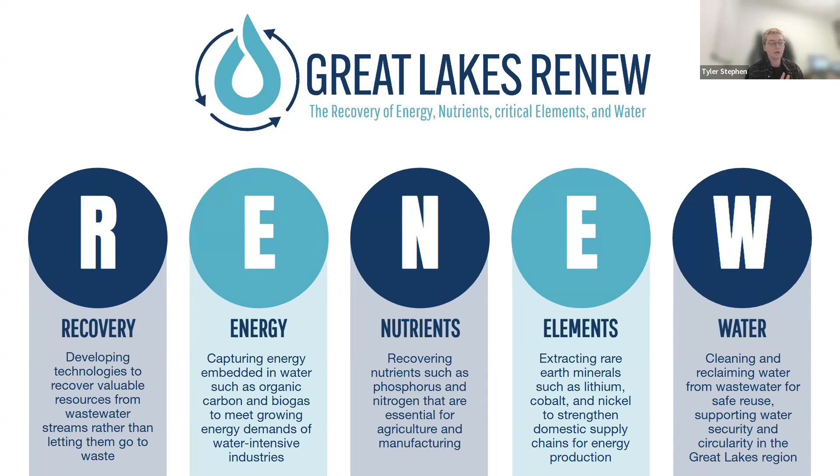We approach that from multiple different areas. We're looking at spurring the circular economy transition, so looking at the workforce required to support circular economy innovation. We're supporting the invention and commercialization of selective separation technologies, through funding of research and development projects at both the academic level, as well as supporting startups and innovators developing use-inspired technologies to support the circular economy. And we're also supporting the attraction and retention of water-intensive industries in the Great Lakes region, including Illinois, Indiana, Ohio, Michigan, Wisconsin, and Minnesota.

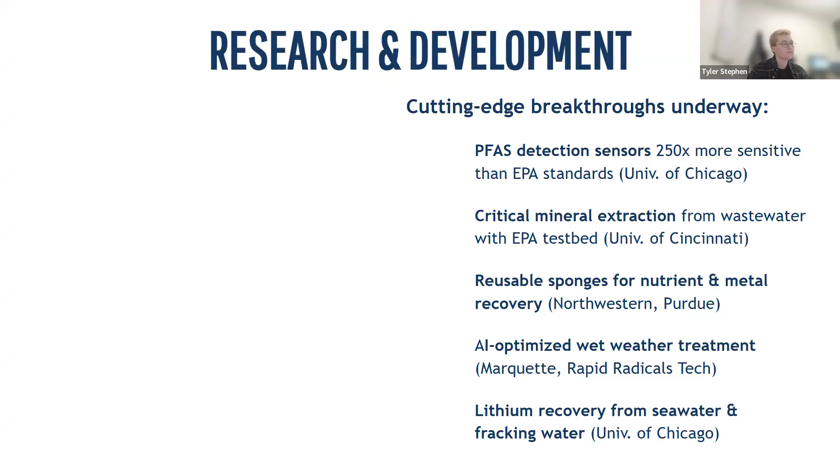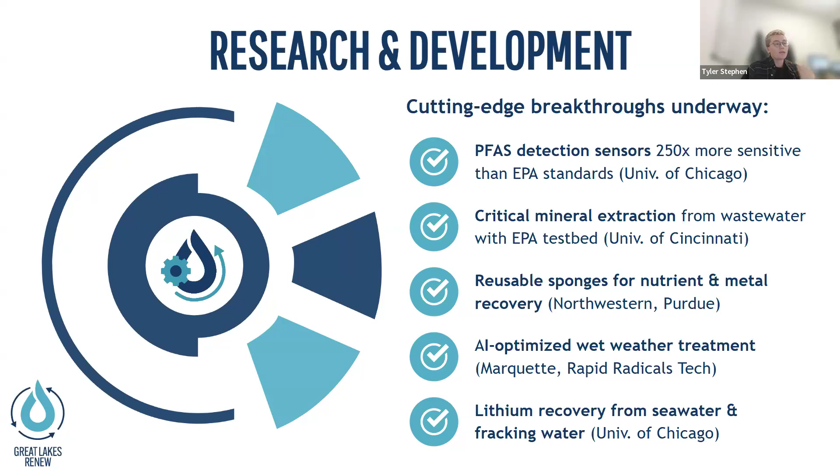Within that class of the recovery of nutrients, elements, and water, we are currently supporting several innovative research projects. Just to give you a highlight: we are supporting projects in PFAS sensing, critical mineral extraction, and nutrient extraction and recovery, all through our research partners at various institutions.

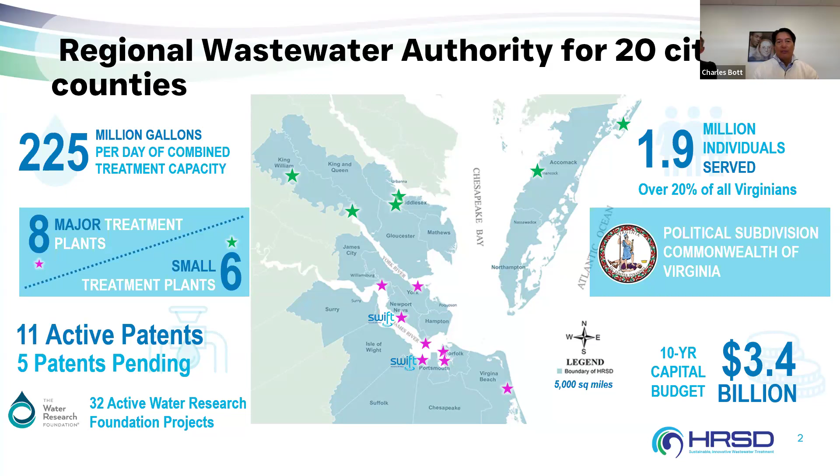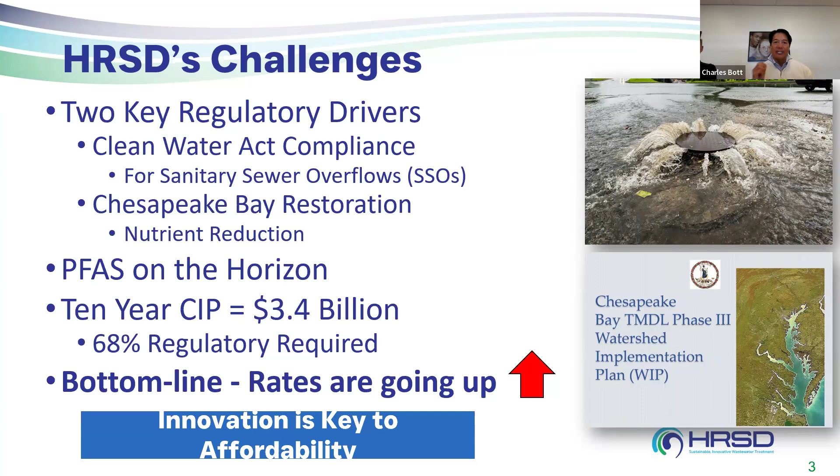One of the things as a utility leader that I've been pushing to my fellow utility leaders is that innovation is the key to affordability. We are not going to be able to control our service area socioeconomic status, but one of the things we can control is our operational cost, our capital costs. And we think that we can do that through innovation. And we have - I'll talk about some of the things that we've been able to do.

But first, I'll talk about our R&D group led by Dr. Bott. It's one of the largest in the country. We've got 23 staff, 6 PhDs, 7 PhDs in progress.

We have 32 active Water Research Foundation projects. I believe it's the largest in the country. We have 11 active patents, 5 patents pending. Dr. Bott will be talking about some of those in his presentation.

The bottom line up front: what can innovation buy you? We saved the region over $5 billion. That's a number that came out of an ODU economic analysis they recently completed.

As I mentioned, there are 2 big regulatory drivers we're dealing with for SSOs and Chesapeake Bay. We did the math, and if every locality and HRSD did our own thing without working together, compliance would have cost over $8 billion. But we came up with a very innovative integrated plan that a judge approved, converting our consent decree to an integrated plan, and we were able to do that for a little over $3 billion.

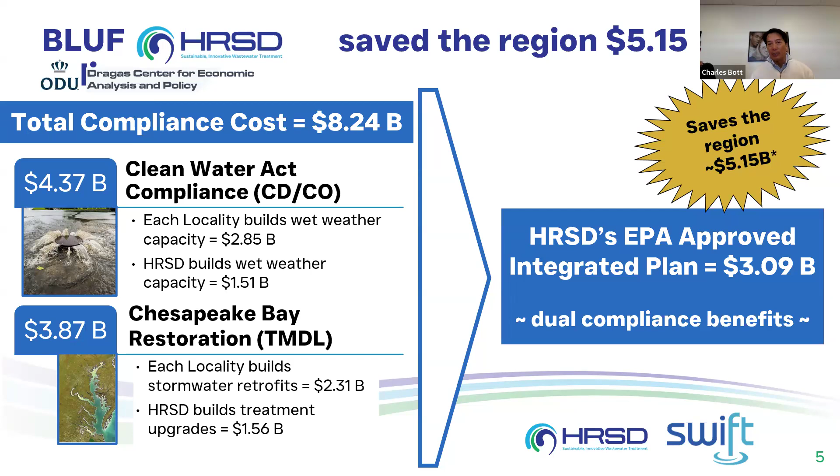One reason is our SWIFT program has dual compliance benefits—Charles will talk about SWIFT later. But what does this mean for our ratepayers? ODU did the math, and they said our ratepayer bills will be 48% lower because of the innovative integrated plan we came up with.

But that's not all. Some other ways we've kept ratepayer bills low—that's our mantra, always researching ways to keep ratepayer bills low. Dr. Bott will talk about all the innovations on how we're trying to do that, including PdNA. We have the first plant in the world doing mainstream deammonification.

From a rate perspective, we save $1 million a year in O&M, but not only that, $100 million in CapEx.

We worked with ODU to develop a low-cost PFAS method for GAC management. That's going to be our largest O&M cost for our SWIFT program. We can't wait 2 to 3 months to get PFAS samples back, so we developed a non-regulatory, operational 30-minute test that's been super helpful to us.

We closed a treatment plant and consolidated a plant, which saved us $239 million NPV.

A lot of people have digester gas and are always looking for different revenue sources. Where we lived on the risk profile is we worked a deal with $0 in CapEx, yet we're going to receive $400,000 to $500,000 in annual revenue. We feel like, from a regulatory environment, who knows how long RINs will be around—just last month the administration closed the offshore wind leases off Virginia, and Virginia has the largest offshore wind farm, so who knows what the regulatory environment will be. We did that deal last year.

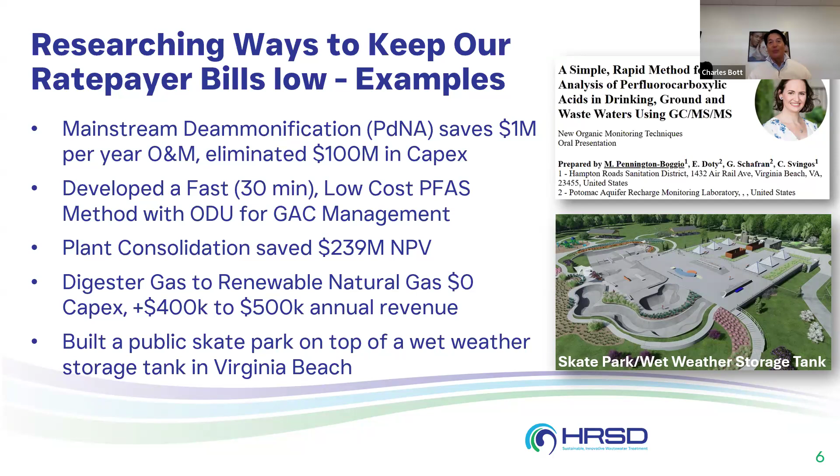This didn't really save us money, but it's an innovative example of how we're always trying to find that win-win. We were looking for a location for a wet weather storage tank, and there was a park nearby. We worked with that city and said, if you give us that land, we'll build you a skate park. So we built the skate park on top of this wet weather storage tank.

Switching gears to our big idea: we are creating this water technology focused innovation system. The big vision is we want to be the Silicon Valley of water tech in Hampton Roads, with HRSD as the anchor for economic development.

If you think about it, if you're a utility leader, it's really an optimization problem. We have all of these great assets, all of this great R&D and patents, but what if we were more purposeful about generating economic development? That's what we're really doing—it's really an optimization problem.

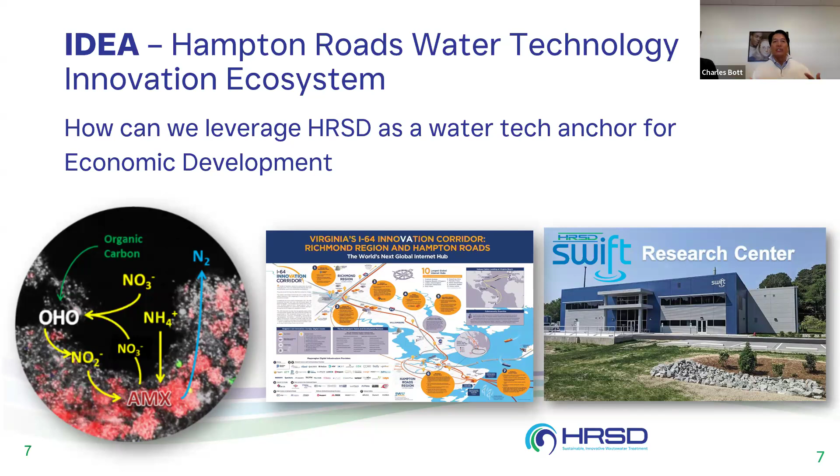Here are some of our objectives with this innovation ecosystem. Similar to what Current is doing, we want to advance water technologies, but we also want to research ways to keep our ratepayer bills low, being efficient and resilient. And then doing things like this webinar, fostering collaboration and knowledge. If we're very purposeful about that and do it right, we can help drive economic development.

AM Team is a startup out of Belgium. They do computational fluid dynamics, CFD modeling, and we're doing groundbreaking work with them, really cool stuff. But one of the co-founders, Wim, had this really cool blog post that went viral.

It talked about how water utilities hold the key to innovation. He published this water industry curve and talked about the chasm of a decade, where startups have a really hard time going from early adopter to early majority, and it takes about 10 years.

One thing to note: when Dr. Bott brings up a slide later about one of our technologies called inDENSE that we developed with DC Water, keep an eye on how long it took us to really have that first inflection point. It was about 6 to 7 years, and it really wasn't until about 10 years that it started to take off.

And imagine that's HRSD, DC Water. We're using this technology, it works - that's how long it took a utility with our brand name, our publish-ability, and it still took that long to get that technology adopted. So one of the things HRSD is trying to do with this innovation ecosystem is reduce that chasm of a decade.

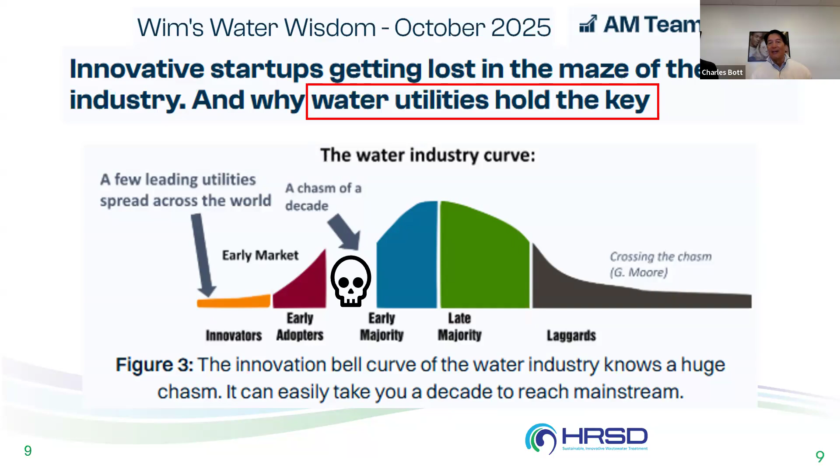Because you can have this brilliant idea, but that company couldn't survive this chasm. So how can we help fix that? That's how we think as a utility, we do hold the key. That's one of the things we're preaching to other utilities: innovation is the key to affordability because we hold the key to innovation. That's really one of the underlying premises of this whole idea.

So we've identified 4 economic development opportunities with our ecosystem. We can incubate or accelerate companies, and we can attract companies.

Maybe 6 months ago we didn't have any, and now we have 3. EOS is formerly called Maya Water, an AI company. Tidewater Trident is commercializing one of our technologies called the Darbalizer. And the Radiance E-beam actually came out of the next opportunity, which is regional collaboration.

Jefferson Lab is a DOE particle accelerator laboratory, and we've been working with them. We published a paper with them on destroying 1,4-dioxane with their electron beam. We were telling them about all the challenges in the water space, and they said, hey, we think our electron beam can destroy PFAS. We'll talk a little bit about that later.

But how can we collaborate regionally with all the different assets in Hampton Roads to really create more economic development opportunities? We have NASA Langley's around the corner. Ferguson, they're the largest water company in the US that's trying to get more into the water wastewater space - their global headquarters is in Hampton Roads, and their market cap is, I think, over 10 billion more than Xylem's.

I'll talk about a cool partnership we've got with Waste Management. And then the idea, currents interested in circular water economy, the idea of industrial symbiosis and how we're trying to do that at one of our sites.

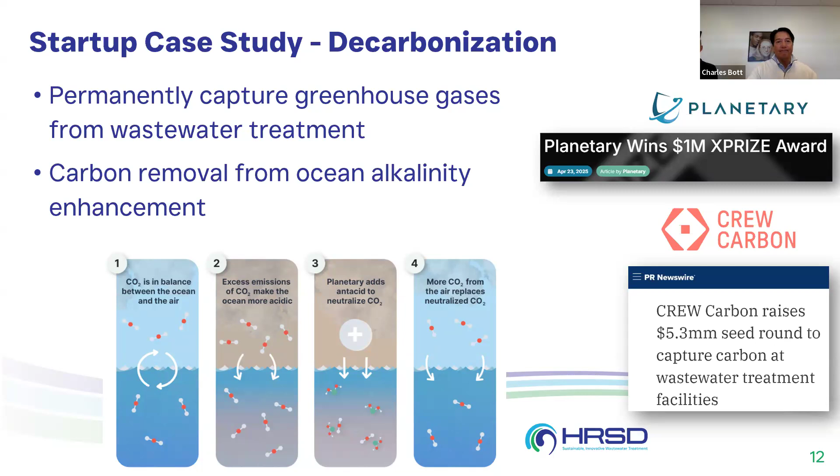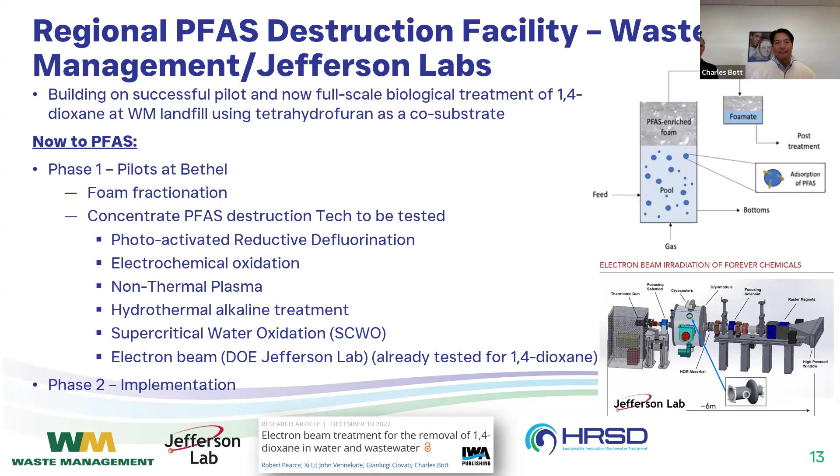If you think about it from an industrial symbiosis, circular water economy perspective, what if you could put a data center there, or some community-friendly industry that can use our digester gas and our recycled water? I visited Denmark, and they have some of the best industrial symbioses in the world—they've been doing it for a long time. Somebody's waste becomes somebody else's input, and they call it profitable sustainability. So what we're trying to do is mimic that model, mimic that circular water economy concept, and look for opportunities like this. I suspect there are lots of these opportunities around the country, where wastewater plants out in the middle of wherever have tons of acres of land that could potentially be a great anchor for a data center or something else.

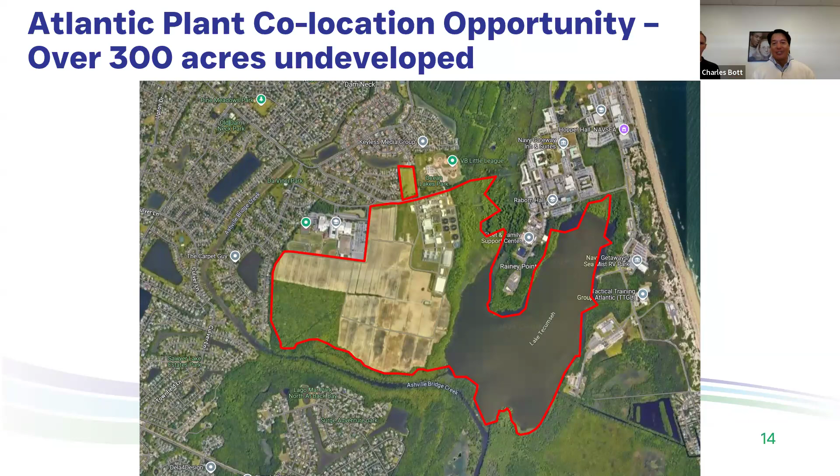All right, thank you. So we have quite a few drivers for technology research and innovation. I'll start by saying not all of our plants have the land available that our Atlantic plant does, that Jay just showed—most of them are completely out of space. So process intensification, along with decarbonization, are really some of our most important objectives. All of our treatment plants, except the Atlantic plant, are headed to TN of 4 milligrams per liter and TP of 0.3, so more nutrient removal is certainly a factor. The impacts of SWIFT on nutrient removal, which I'll talk about in a second, are significant—minimizing SWIFT capital and O&M costs, and emerging treatment issues. The bottom line is, HRSD partners with our peer utilities and with universities to host graduate students working on the development of those technologies, and we partner with technology providers to deliver those technologies, ideally to us first, and then to everybody else.

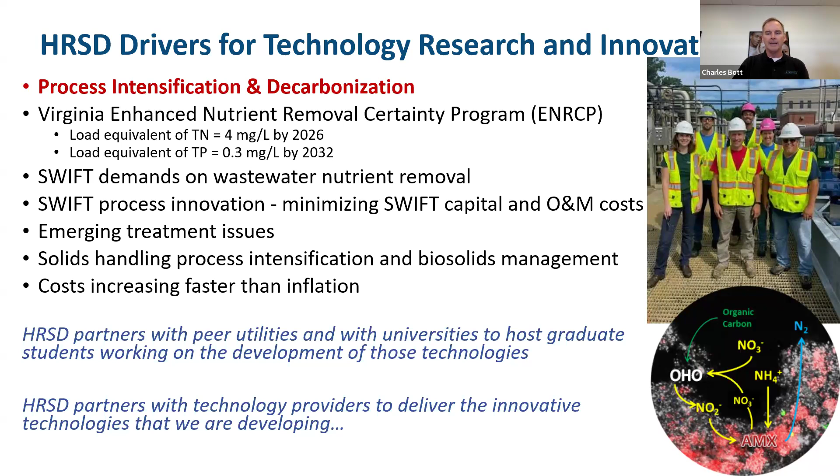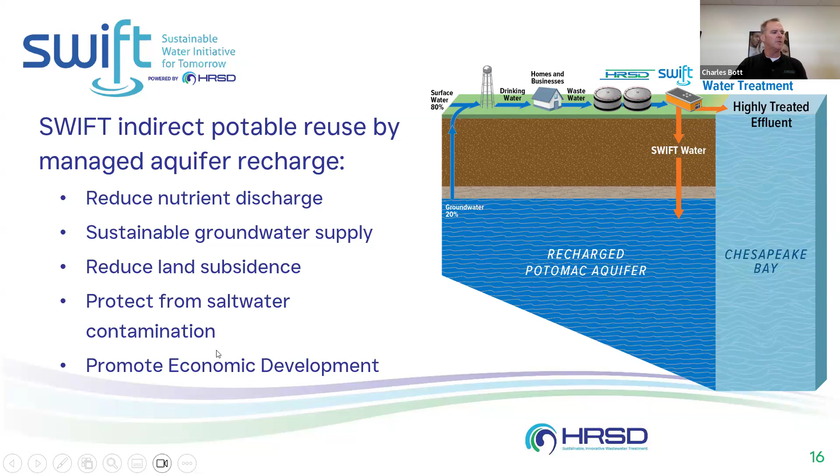So SWIFT—SWIFT is really indirect potable reuse by managed aquifer recharge, and this is resulting from a number of drivers, including reducing nutrient discharge, managing the groundwater supply in Eastern Virginia, potentially reducing or even reversing land subsidence, saltwater intrusion protection, and even economic development.

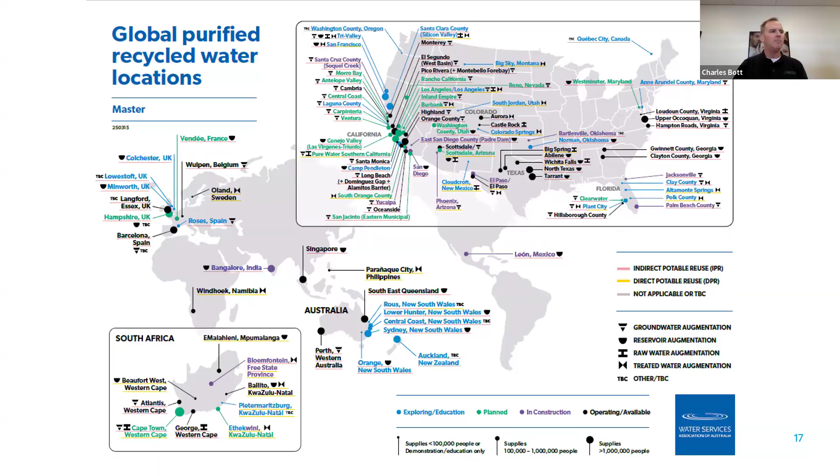So in the context of indirect and direct potable reuse, SWIFT is one of a number of projects around the world, and of course, potable reuse has become a very significant deal. HRSD started this work in about 2016, and we now have in place a demonstration facility since 2018, a 1 MGD facility, and the next phase is really full scale.

So this is an update of what SWIFT is for us and what it will be, and that is 50 million gallons per day by 2029, 2 treatment plants, one 16, one 34. So this is adding advanced treatment and recharge wells.

The first facility is commissioning right now. It's actually more than 80% complete now, very large project. And the second project is just getting going. Phase one is really a plant expansion, and then phase two is the SWIFT part. We've broken ground, but we're still at the 90% design level. It's a big design build project.

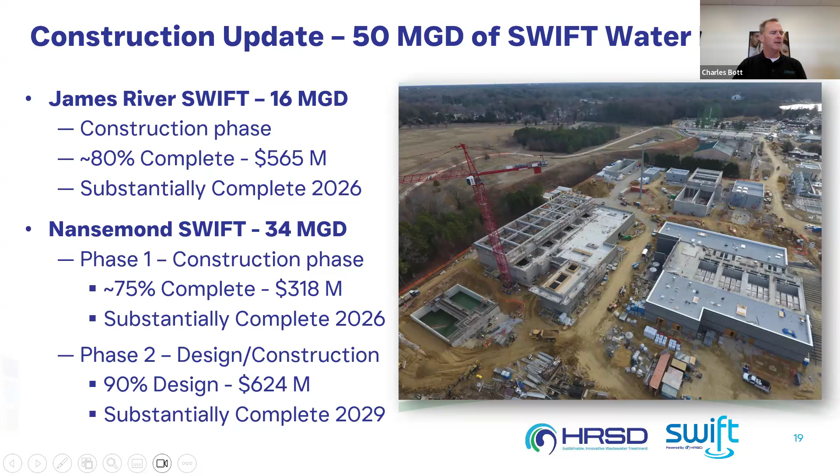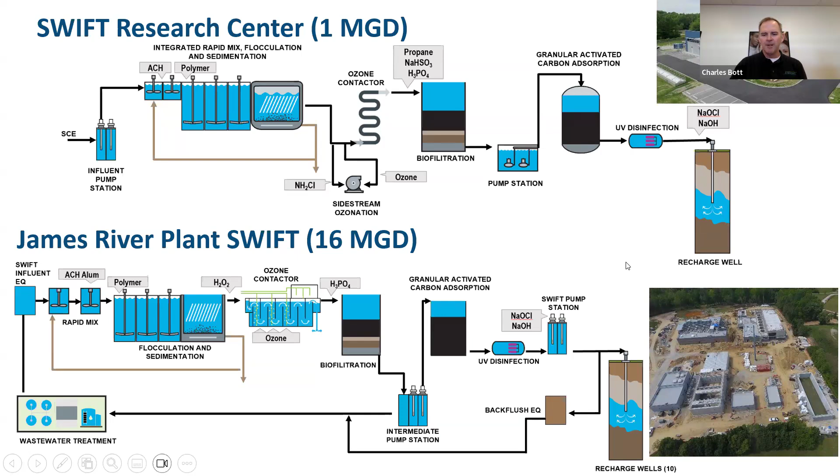But this is very definitely carbon-based advanced treatment. So it's coagulation, flocculation, sedimentation, ozonation, biofiltration, granular activated carbon, UV disinfection, and recharge. You'll see some things here, hopefully, that are causing some questions, and hopefully this answers some of that.

So this is the sort of active R&D that is going on in the SWIFT world. With respect to rapid mix, flocculation, sedimentation, really the objective is to intensify ozonation, maximize emerging contaminant removal, minimize bromate formation, and maximize disinfection.

We've done a lot of work to get to our full-scale ozone system design. That work involved two PhD students from Virginia Tech.

We've done a lot of work on biofiltration, trying to understand the impacts and effects on NDMA removal, adding propane as a co-substrate, even at this 1 mgd scale, to enhance 1,4-dioxane removal, and demonstrating how robust the biofilters are to shock loads.

From a GAC standpoint, this is where actually most of our work is happening right now. It's really in two pieces. One is minimizing GAC usage for PFAS removal, which is really driving GAC utilization right now, but also minimizing the cost of GAC.

So Jay mentioned GAC reactivation. We're looking at microwave and superheated steam. Using ion exchange and novel adsorbents to polish after GAC, optimizing parallel gravity contactor operation, and so on.

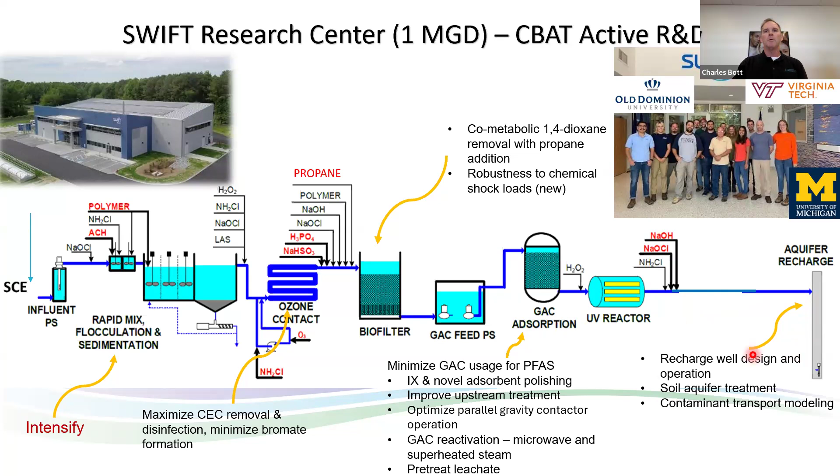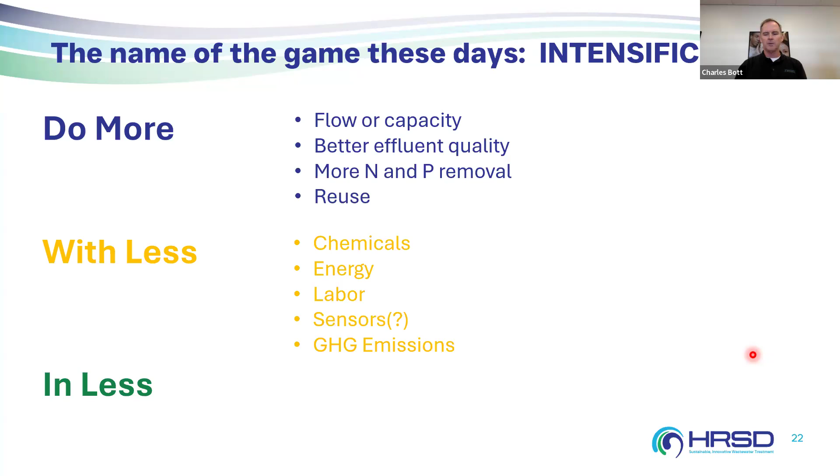When we go back to wastewater R&D, really the name of the game these days is intensification, and I like this: do more with less in less. So more flow, more capacity, better effluent quality, more nitrogen and phosphorus removal, reuse as SWIFT certainly is, with less chemicals, energy, labor, sensors, maybe even greenhouse gas emissions, in less concrete tank volume.

The biggest cost by far is, whenever we decide we're going to build a new concrete tank for anything, it's $100 million just to get in the door. So the concrete tanks is really where the money gets big these days.

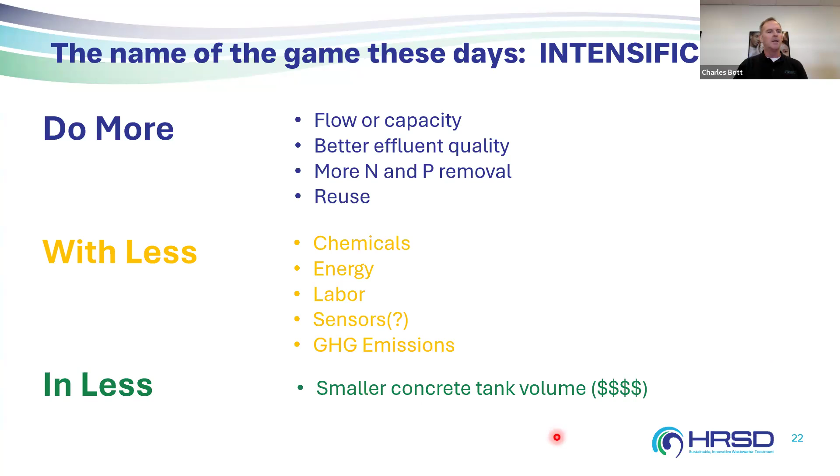So one of the technologies that we're very proud of that now is quite a few years old is inDENSE, and I'll just give an overview of this. This is now more than 140 installations globally across 40 countries, including some big ones in the U.S. And this in the U.S. has been commercialized with World Water Works.

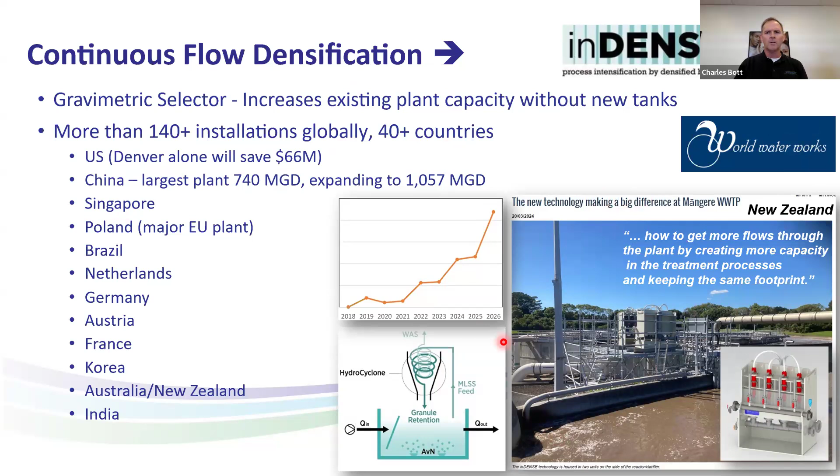This is number one. This is about 10 years ago in our James River plant. And those of you who recognize inDENSE will not recognize these cyclones, and that's because these cyclones that we first installed at James River plant didn't really work.

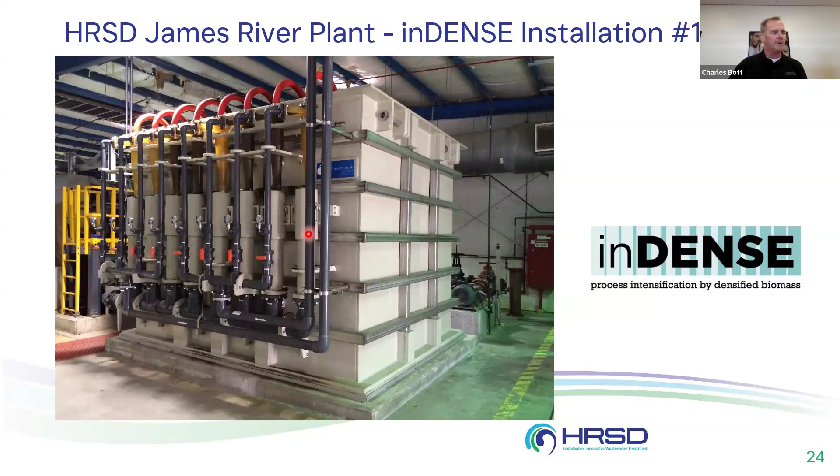And when that happened, we set about on a program to understand how to size and select cyclones, and we had built this big test rack and tried to get our hands on every cyclone we could, and slowly figured out what made sense in terms of the cyclone to choose.

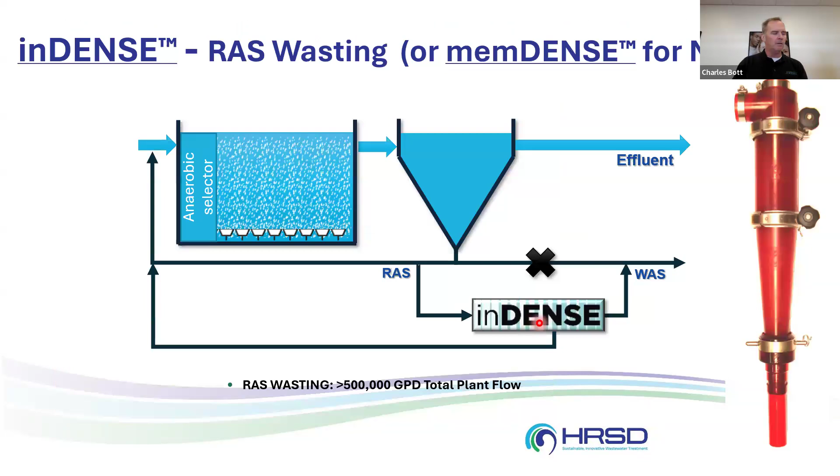And this is what that cyclone now looks like. It is basically deployed as a selective wasting approach to waste the less dense, slower settling material and retain the heaviest material. It can also be applied, typically in smaller plants, in this mechanism and sort of more of a RAS wasting approach.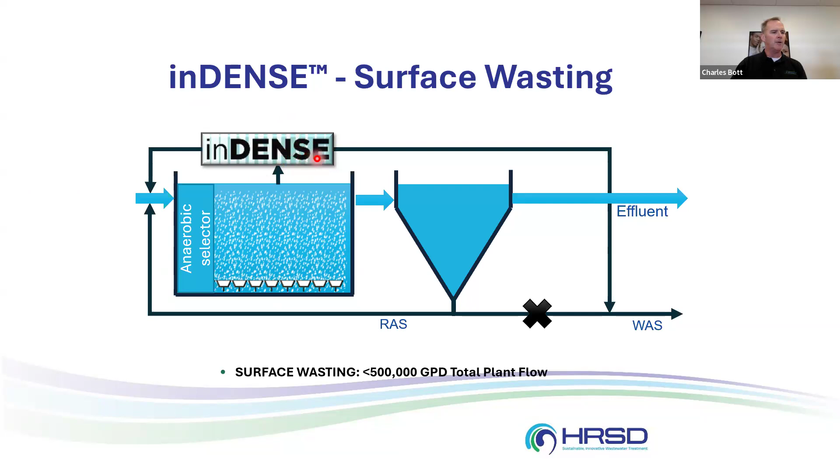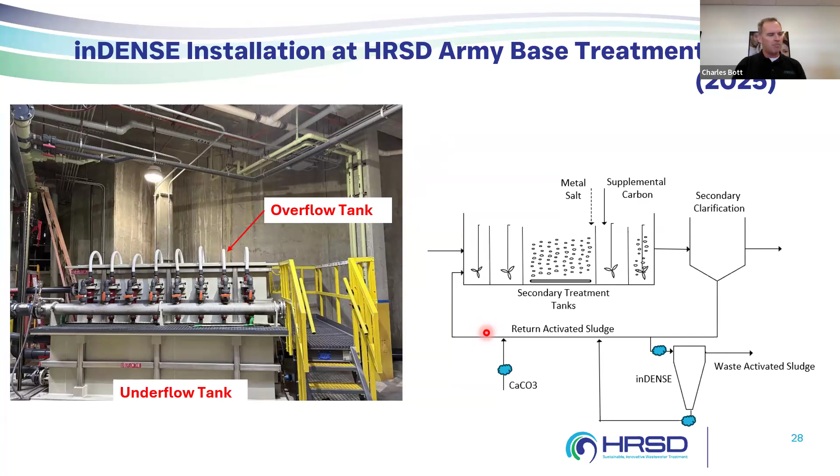This technology has really grown. It was developed jointly by HRSD and DC Water, and it's grown pretty significantly. This is our newest installation at our Army base plant, and this is what the equipment package looks like now. We just put this in, and this plant in particular has wintertime Microthrix parvicella problems. It's our only BNR plant that has that problem. We have no idea why, but this is our solution for it, and we're expecting a much better winter and spring from a settling standpoint.

As George mentioned at the beginning, one of the things we've been working on now for almost 15 years is shortcut nitrogen removal. We have a lot of work going on to upgrade our treatment plants for better and more nitrogen removal, basically moving them all to 3 or 4 milligrams per liter TN. Doing nitrogen removal in a way that makes more sense is really the goal.

Nitrite shunt is one way of doing this, and I think most of you are aware that we know how to grow AOB and not NOB in the side stream part of the plant, centrate treatment from anaerobically digested solids that's warm and high in ammonia. But I would argue nobody has figured out how to do this in the main part of the plant reliably yet, and reliably being the key there.

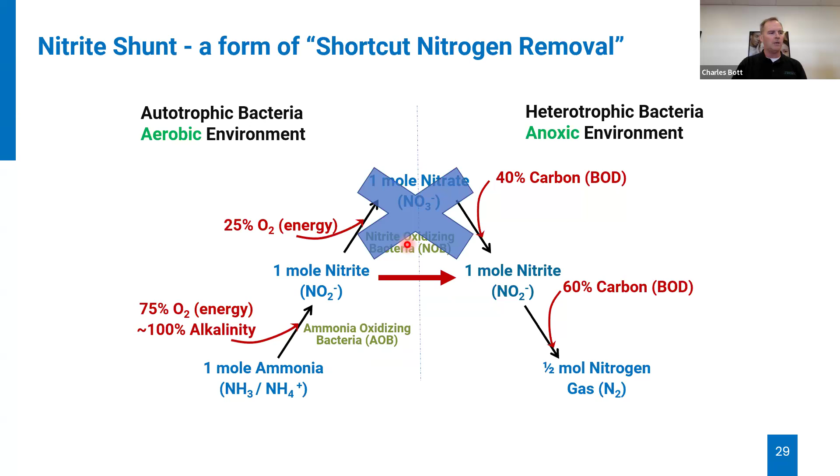The second piece of this is, of course, Anammox. If we can figure out how not to grow NOB but grow AOB, and combine that with Anammox, then we get partial nitritation Anammox. This is really the holy grail, this is what everybody wants. Again, we know how to do this in the side stream part of the plant. The key is doing it in the main part of the plant.

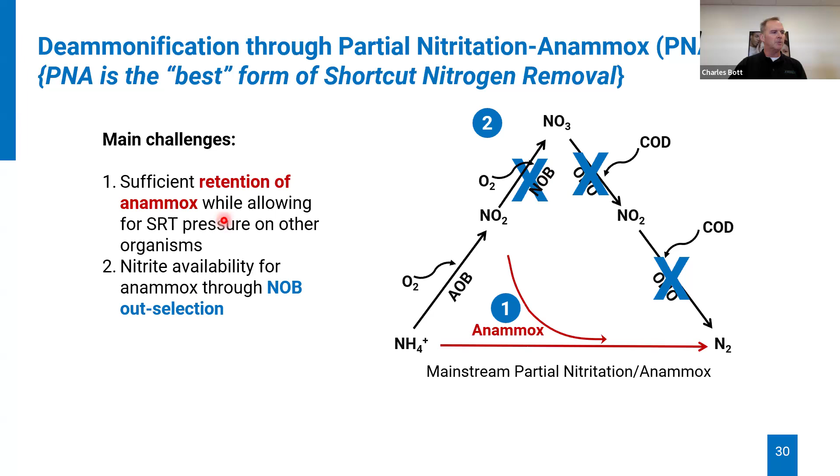So the main challenge is sufficient retention of Anammox while allowing SRT pressure on other organisms. We know how to do this now, Anammox are not the problem. We have to provide an appropriate place for Anammox that accommodates their slow growth rate, and we know that biofilms do that really well now. But number 2 here, in the main part of the plant, is a real challenge.

Again, we know how to do this in the side stream for anaerobically digested solids. It's both warm and high in ammonia, and that makes the NOB out-selection work really well. HRSD was the first to do this in North America.

In 2012, we converted a tank that was available here to Demon, a side stream PNA process. And actually in 2026, we'll be converting it to a slightly different version called DEANA, which is basically a moving bed biofilm reactor process.

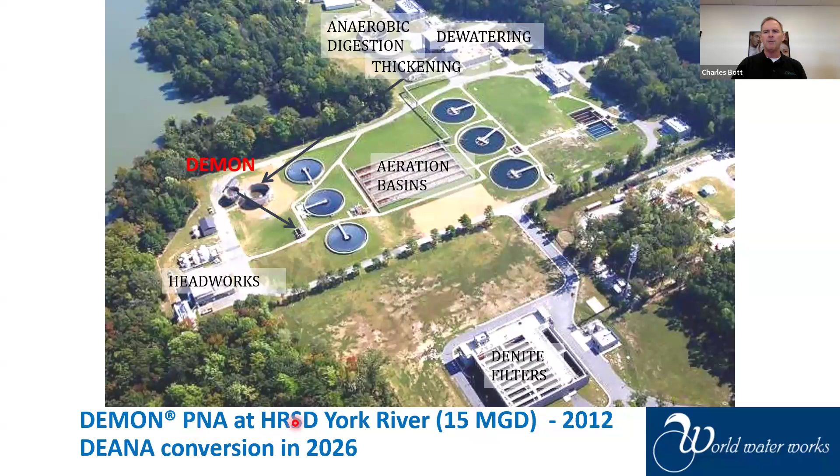So for our plants with anaerobic digestion and the need for nitrogen removal, we're basically now covered with respect to side stream deammonification. We have it at all 3 of them: York River, James River, and Nansemond. The last one we just installed and are in the process of starting it up. So side stream PNA, no problem.

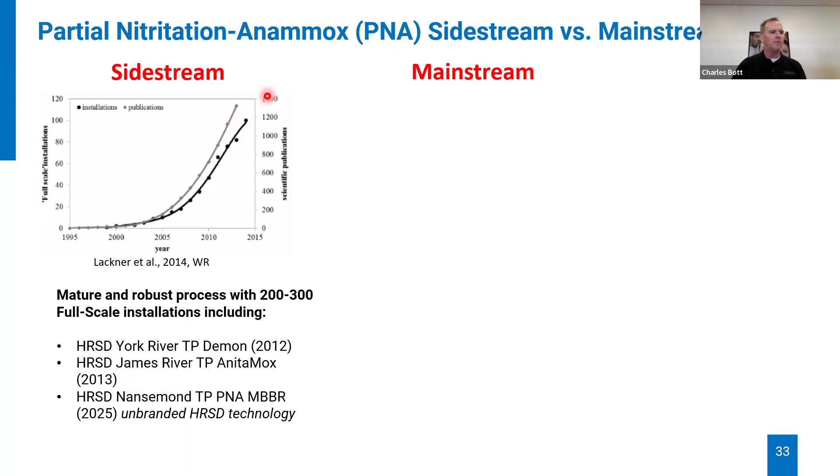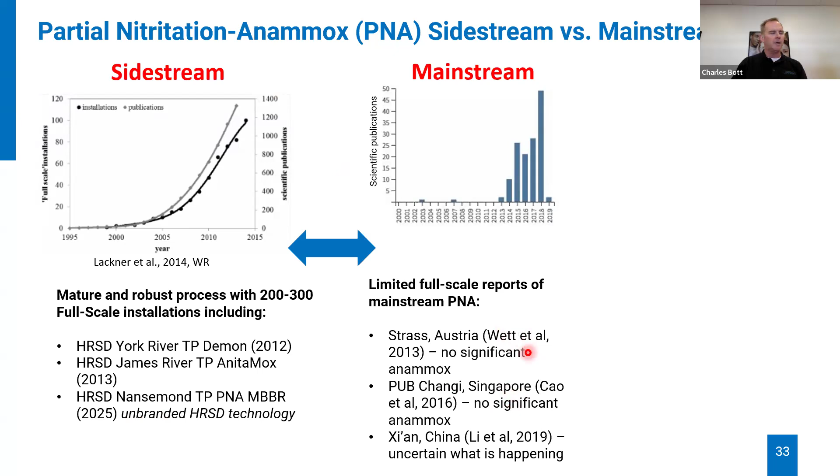Mainstream, there's really not that much happening. There are some publications, but it's not really clear these plants are achieving a lot of nitrogen removal through PNA, and the real challenge is NOB out-selection.

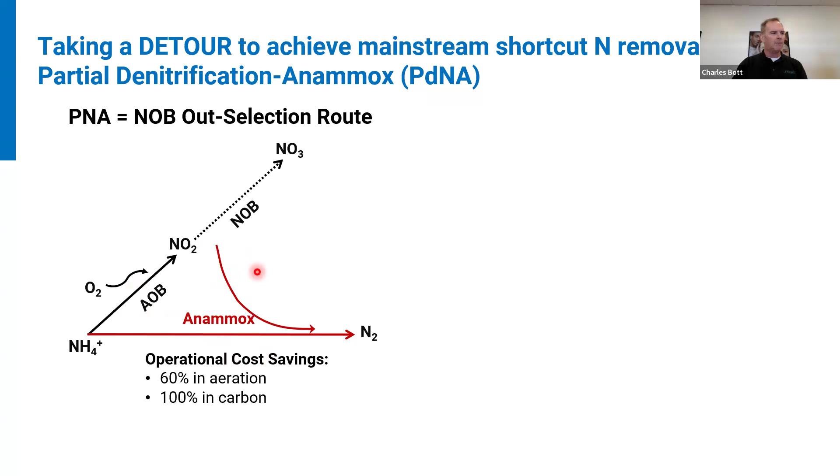So if we go back to our schematic here, while we would like to do PNA, and this is really the goal, what we discovered some years ago is that while PNA is really hard, pDNA just works. It is a compromise, and I think we really didn't get serious about this because of understanding this compromise. But as we discovered how well this works, and that it gets Anammox in the plant, and we do get some meaningful benefits, then yeah, we are now doing this.

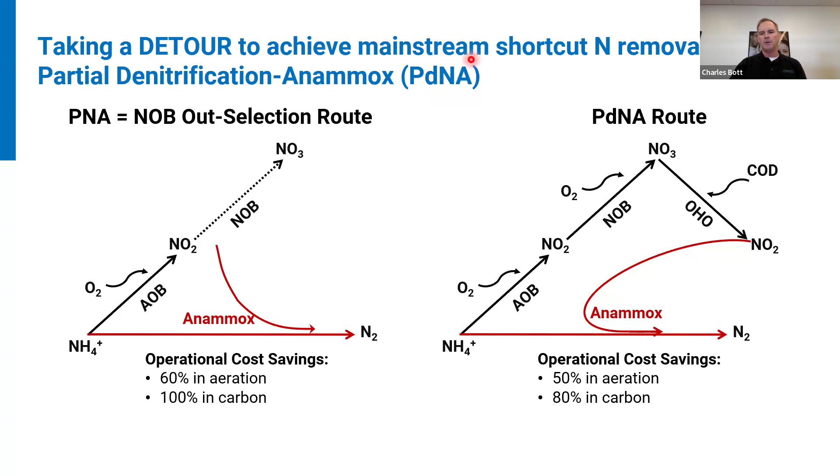The word detour has been used to describe this, and this is a nice, interesting play on words from Haydée De Clippeleir at DC Water. Taking a detour to achieve a shortcut is what we're quite proud of, and that resulted in this whole thing getting branded as detour.

So at HRSD, we've been working on this for quite a while. It goes back to 2012 and pilot work, really done in the context of A/B at the time, and really mostly focused on PNA.

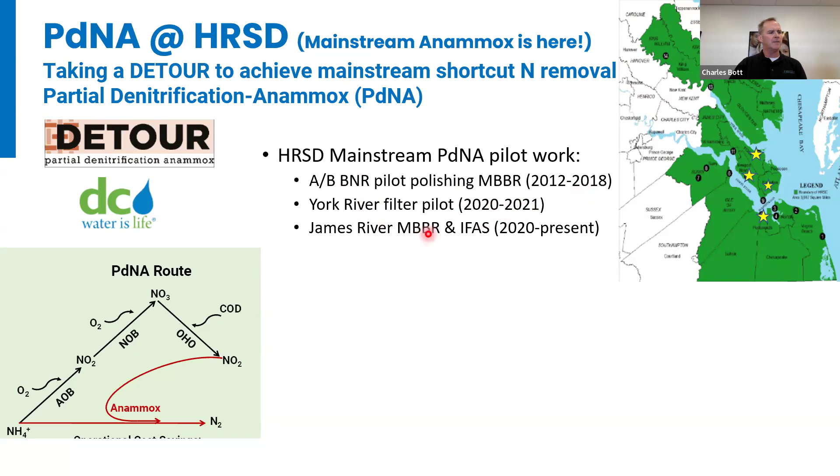We did a filter pilot in 2020 to 2021, and since then we've been working on MBBR and IFAS. This is the original pilot work, which was actually done in a polishing MBBR in this reactor. A number of graduate students went through this pilot facility from quite a few different universities, and here's a picture of some of those various teams over the years.

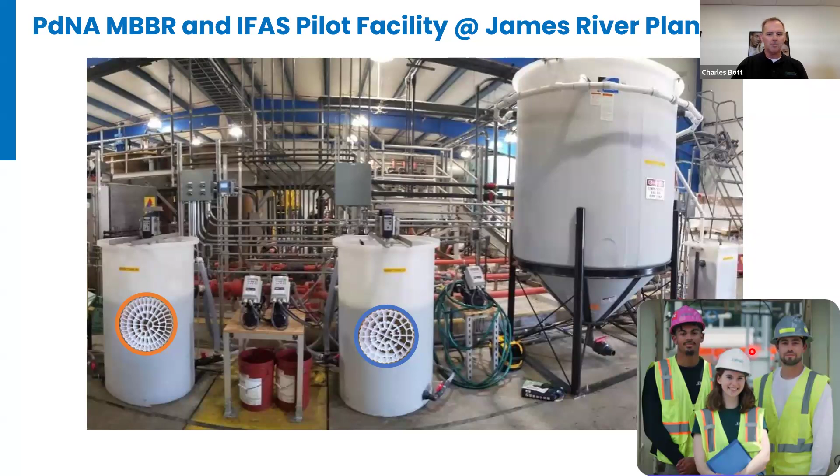The new pilot facility looks like this, and is focused on MBBR and IFAS, with another group of graduate students. Although I need an updated picture because all of those students have now moved on and we have a new batch.

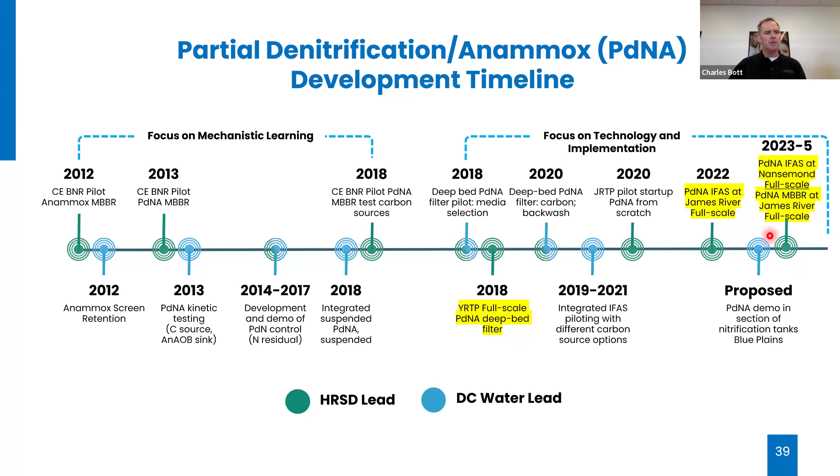With respect to what we've done, HRSD and DC Water have all been sort of working on this together with various universities for a long time now, but we really didn't get serious until 2018. When we realized that this MBBR was working quite well doing PDNA, we decided immediately to go full scale at our York River treatment plant in a filter, although we had never piloted that. And it worked quite well. Since then, we've been doing MBBR and IFAS, and I'll talk about what that looks like full scale.

But before I do that, this is what we know how to do. From a process standpoint, we know how to do PDNA in a polishing type process, an MBBR, a deep bed filter, or a BAF. We know how to do it there, and we know how to do it in the form of IFAS in a second anoxic zone. From a process standpoint, this is not a challenge. From an engineering standpoint, it's very definitely a challenge, and that's mostly related to trying to get IFAS retrofitted into existing aeration tanks that maybe don't have the head loss to readily allow screens to be installed to retain that media.

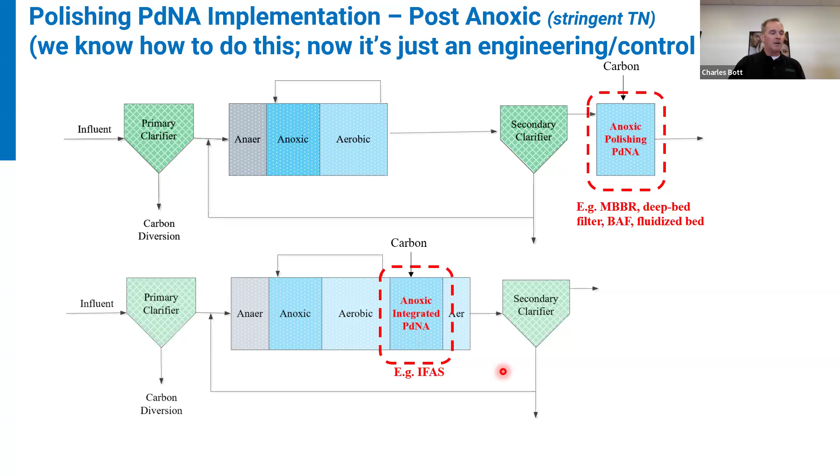One of the things that goes with this, both a benefit and a challenge, is the need for AVN control. What PDNA requires is that we feed these zones properly, and that happens with AVN control. We don't care what the ammonia is going into this anammox zone, as long as there's enough anammox activity to remove that ammonia. The key is the ratio of ammonia to NOx. If we don't get that ratio right, based on the PDN efficiency we're seeing in these PDNA zones, then we don't get good low effluent total nitrogen. So controlling AVN is really the challenge here, and that can be done by manipulating DO, aeration time, step feeding—it's really just a bump up in complexity from what we already do, which is ammonia-based aeration control.

One of the benefits, though, is that PDNA becomes a really significant intensification technology. What do I mean by intensification? I mean it's driving down the size of these aeration tanks and clarifiers, which I already pointed out is where the big money is. How does it do that? Well, we're not reliant on maintaining an aerobic SRT sufficient to drive the ammonia at the end of the aerobic zone to very low concentrations in the wintertime—that's what's determining the volume of this whole thing. Now we're reliant on this anammox process, or PDNA process, to remove some of the ammonia downstream, and we can let 3, 4, 5, or even 8 milligrams per liter of ammonia slip out of this aerobic zone to the PDNA zone and rely on anammox to remove it. That is a huge intensification benefit.

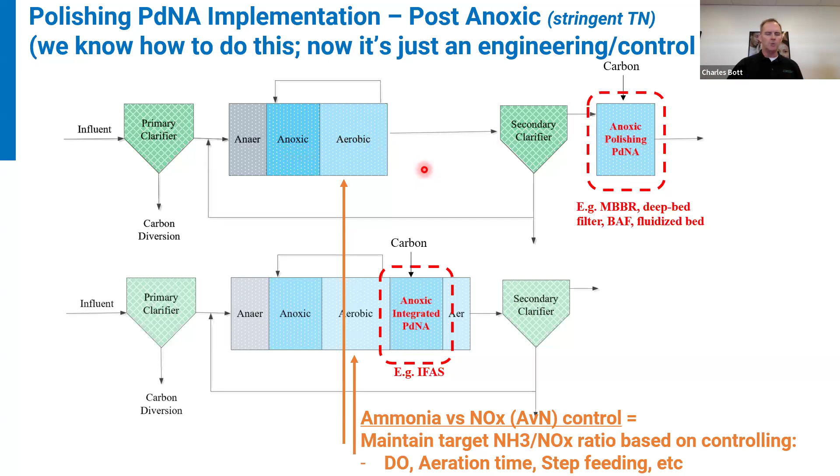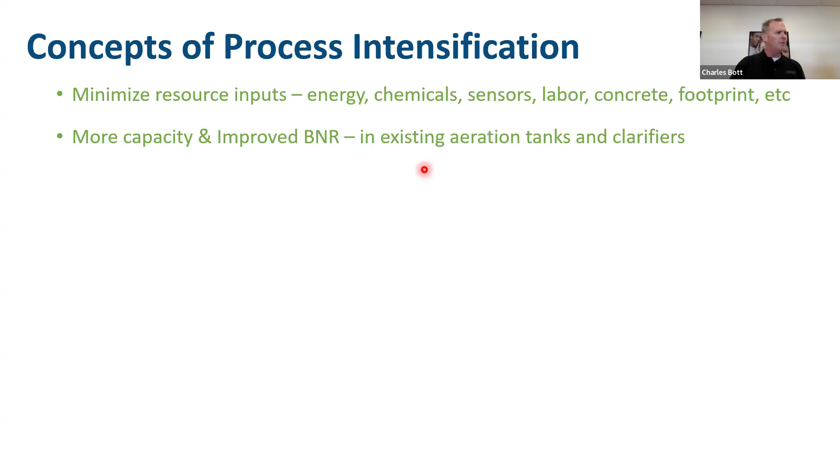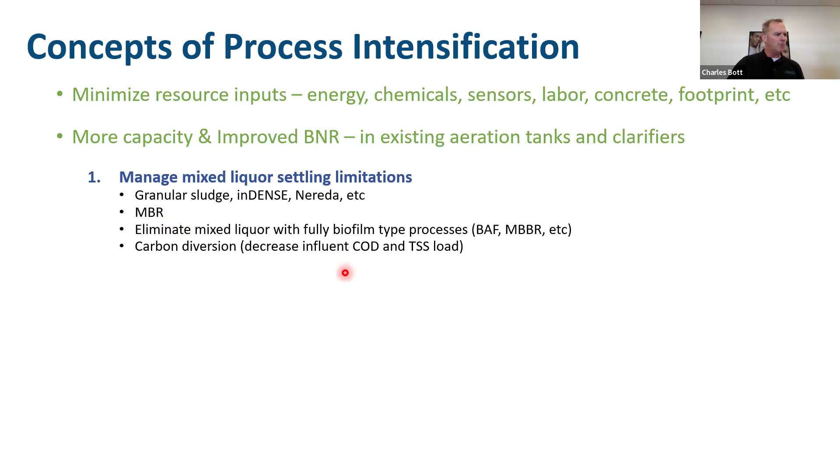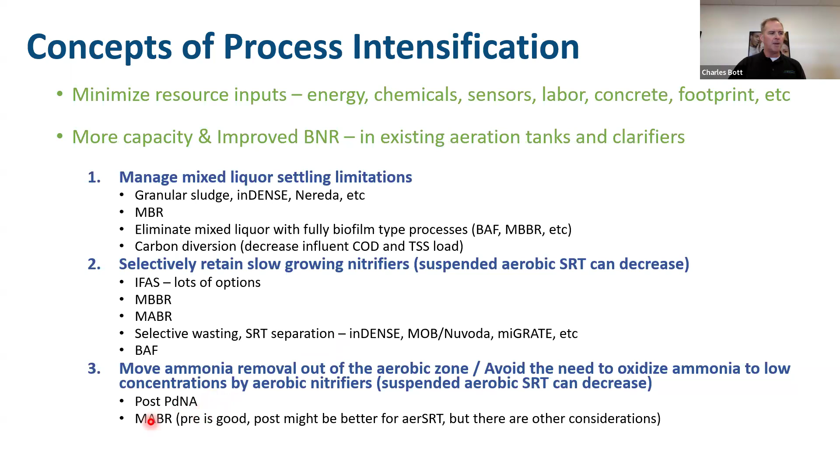So let's just review. This is very much a state of lots of argument right now in the industry, but this is very much my opinion, and very, very definitely up for argument. These are what I think are the important concepts from an intensification standpoint. One is managing mixed liquor settling limitations—so we think granular sludge, or Nereda, or just remove the need to settle altogether with a membrane bioreactor, or maybe divert carbon and decrease the COD and TSS load. Two, selectively retain slow-growing nitrifiers, which allows the suspended aerobic SRT to decrease, and there are lots of options for doing this: IFAS, MBBR, MABR, selective wasting, and so on. And then the last one is move the ammonia removal out of the aerobic zone, move it downstream, and this is how post-PDNA becomes an intensification technology, and MABR may be much the same.

So as I said, we went full scale at York River in our deep bed filters in 2018, and that resulted in significant savings in chemical and energy. This is our York River plant. It was an ideal plant to do this. We use a lot of methanol, caustic, and ferric because the existing system, for some old reasons, was a fully aerobic, fully nitrifying activated sludge process, followed by full deep bed filters.

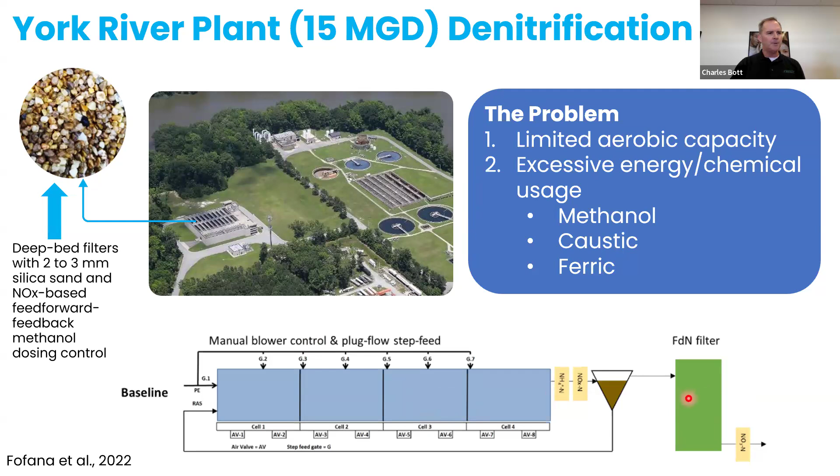We converted those filters to PDNA filters and actually converted the upstream process, without any additional concrete, to a pretty radical intermittent aeration with intermittent step feeding. That resulted in both an aerobic SRT decrease, which allowed carving out anaerobic and anoxic zones, and a big savings in methanol.

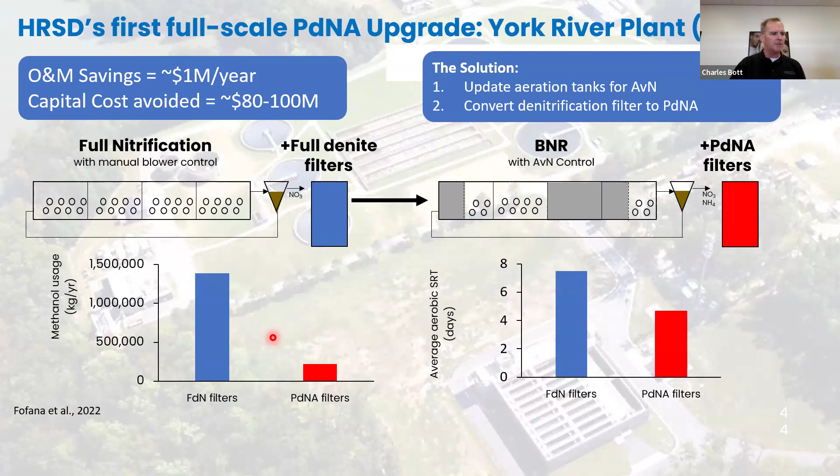We also eliminated caustic addition and nearly eliminated ferric addition, because now this plant does BioP as well. We realized that while this worked, and it took about a year to get going at full scale, we really didn't learn everything we needed to know about pDNA in a deep bed filter.

So we partnered with Xylem to bring in their Eliminite pilot system, and partnered with DC Water. This is the graduate student who actually worked at this pilot at our York River treatment plant.

After a year of piloting, the results were that there's really no compromise in the full-scale design of a filter to accommodate pDNA, meaning that if we design a filter to do full denitrification, it can readily be adapted and converted to do pDNA. There's no reason to switch to glycerol based on the cost comparison with methanol.

That was one of the questions. Glycerol is known to do better PDN than methanol, but it doesn't warrant, based on the cost difference, a switch to glycerol in a filter.

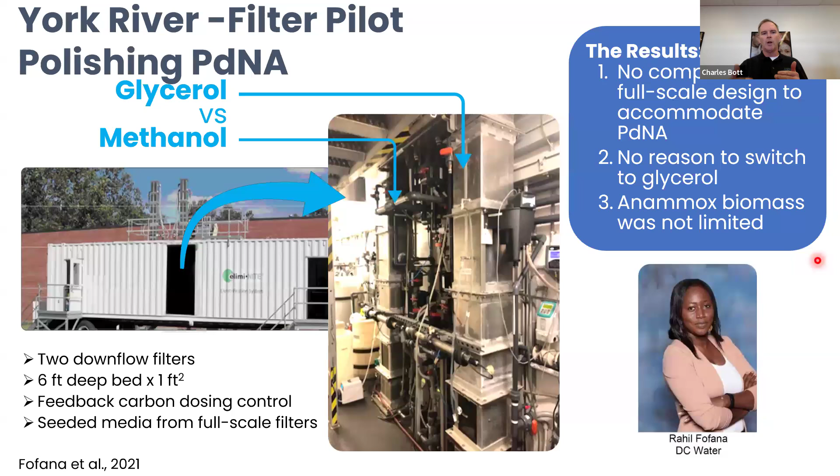And the filters were never Anammox biomass limited. There was a huge excess of Anammox activity grown up in these filters over time, and we see the same thing full scale. So while we might be able to load the filter with up to maybe 8 milligrams per liter of ammonia, the filter has the capacity to remove as much as 30 milligrams per liter. That's very important for getting through the winter, meaning the temperatures of our wastewater cool off faster than we can expect Anammox to grow up.

From an IFAS and MBBR standpoint, we've learned a lot as well, that it takes about 2 to 3 months under warm temperature conditions to establish Anammox without any Anammox seeding. So we don't call it summer anymore, we call it Anammox growing season here. And we're actively waiting for summer right now to grow Anammox again.

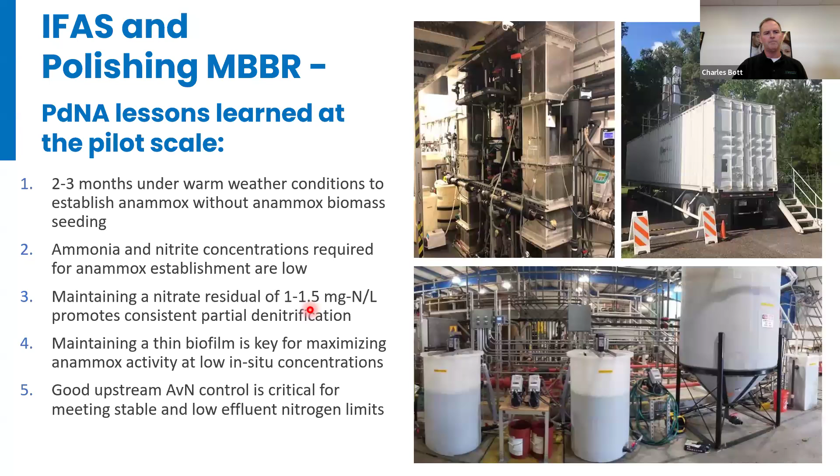Ammonia and nitrite concentrations for establishing Anammox are low, meaning we only need about 1 milligram of ammonia and nitrite in the bulk to do that. The key for partial denitrification is very carefully controlling the nitrate residual. I mentioned before, good AVN control is really critical.

So at James River plant, we did this. We went straight from pilot to full scale in a very small zone, and this is now a small second anoxic zone that we carved out at this plant that already had aerobic IFAS, and are now doing pDNA by IFAS in this whole plant.

And we've got Anammox now grown up in almost all of these tanks now at a pretty high rate that's very similar to what we saw in the pilot, sufficient to remove between 2 and 4 milligrams per liter of ammonia in that tank.

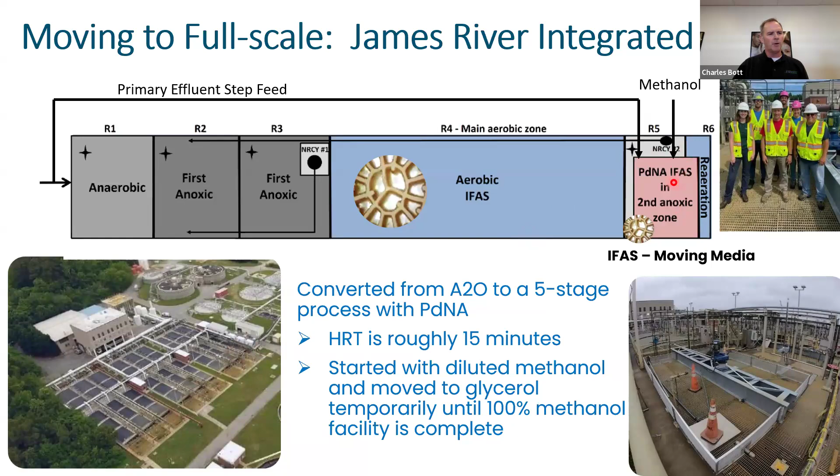The next plant is Nansemond, and we're actively converting the first cell of the second anoxic zone at this plant to pDNA by IFAS. This tank number 6 here was supposed to have started up in January 2025. We had a lot of problems with the IFAS part of that. We've made some design changes and built them, and are in the process of putting that tank back in service now, so that's pretty exciting.

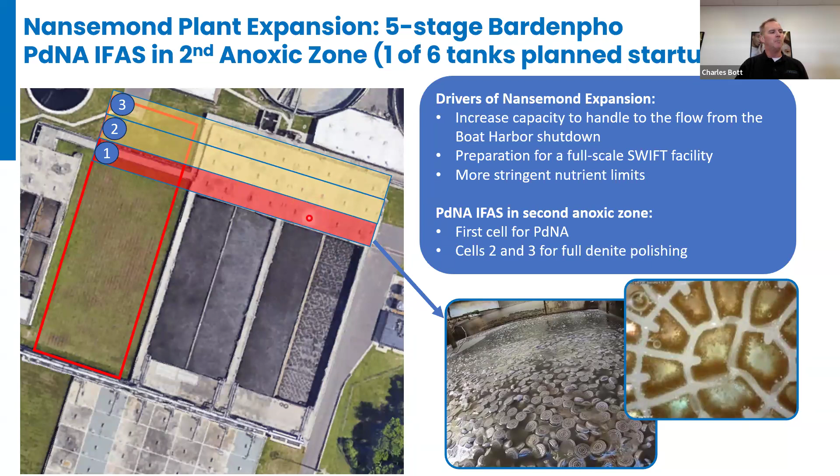This is a much larger plant. This plant is being expanded to 50 MGD. So yeah, much bigger application here.

As I mentioned, one of the challenges here is AVN control, and we're relying on our understanding of operating most of our plants in ABAC, where we position an ammonia sensor at the end of the aerobic zone and use that with a PI loop to determine the appropriate DO set points that meet that ammonia set point at the end of the aerobic zone.

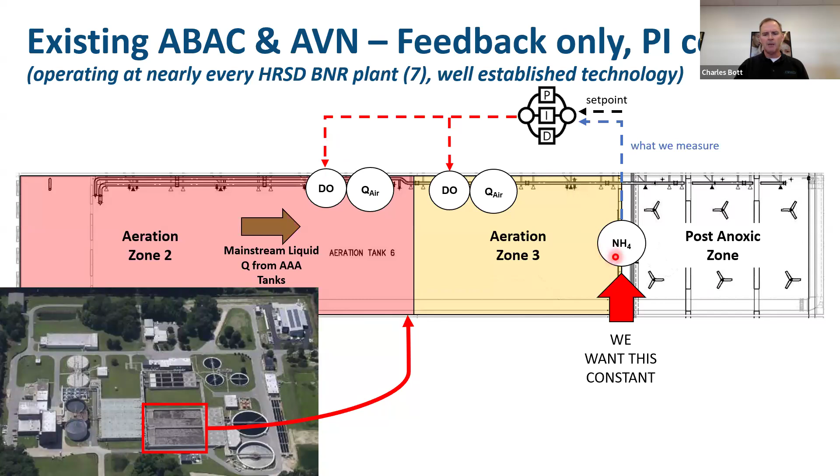We've done this and we know this, and it works, but it's most definitely not perfect. And when we think about converting this to AVN, it needs to be definitely better.

And our demand for them, even at our own treatment plants, is more than we can meet. Josh has been replaced by Shelby, but we're still continuing to do this. But we're also now looking to commercialize this and just starting that process right now.

The other thing we're thinking about a lot is the controls to do AVN, and we've done a number of different approaches. One is just adjusting for the changes in influent flow rate, and that's been done at James River plant. That sounds quite simple, but it's not. It requires a model that predicts what the DO should be based on the influent flow rate, and it's not trivial to get that model. And it's also not a model that's consistent year long.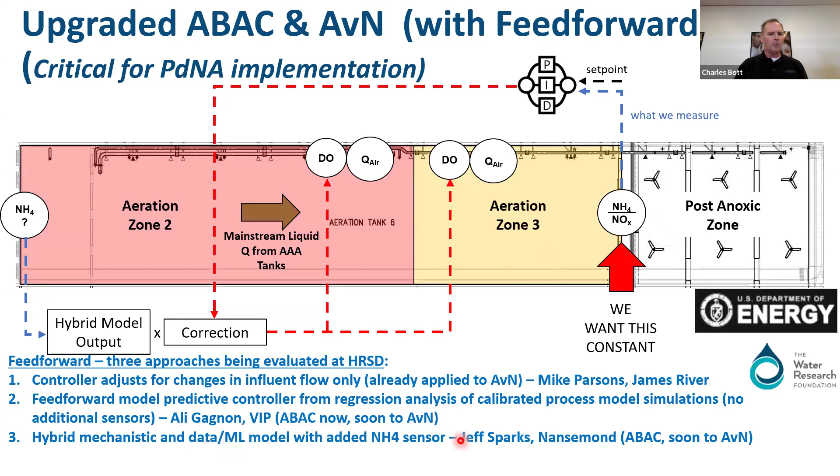Ali Gagnon has done something a little more sophisticated. And then Jeff Sparks at our Nansemond plant created a hybrid mechanistic and data or machine learning model with an added ammonia sensor running on a digital twin, a Sumo-based digital twin at our Nansemond plant. And that's worked quite well. As a result of that, Jeff Sparks is now our director of digital water.

And we have a sort of brand new department that's focused on harnessing data and models to optimize wastewater operations and lower cost and really driving innovation toward resilient and efficient wastewater systems. So in a very short time, in about 2 years, we've developed a whole digital water department with 3 engineering staff, one focused on GIS and spatial type topics, one focused on treatment plants, and one focused on hydraulics and pumps and pipes and the interceptor and collection system.

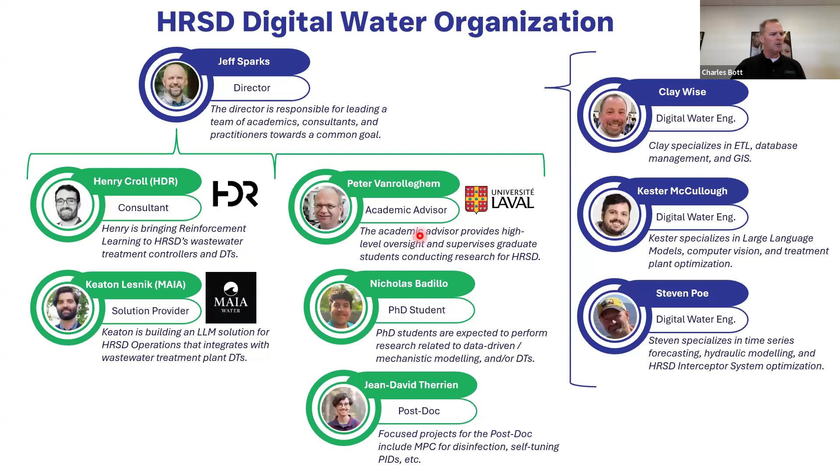We've gone after very specific talent here with outside entities. So reinforcement learning from a guy named Henry Croll at HDR. We partnered with MAIA Water for their agentic AI solution. Peter Vanrolleghem is actually tied in closely with this group, and we have another PhD student working as well here.

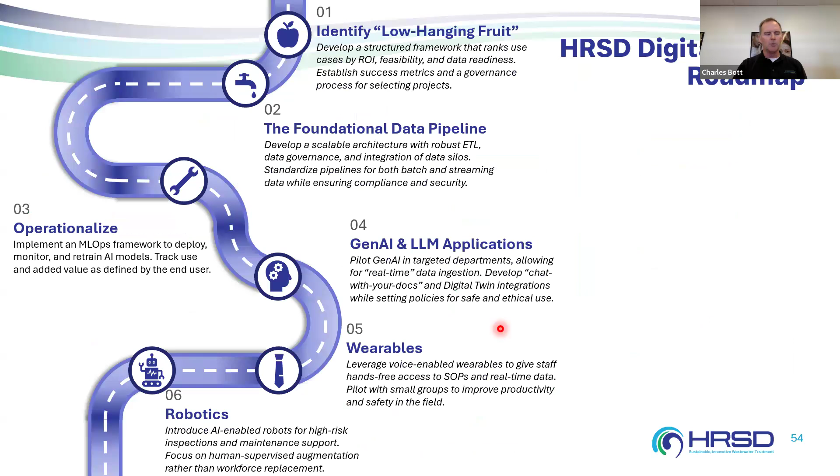The digital water group is really focused on problem solving. So the low-hanging fruit is the key to this group, meaning we've identified more than a dozen problems, and the objective is to use the tools that we have available now internally with our own staff to solve those problems. And that list of problems includes both treatment plant problems, associated with ABAC and AvN, flow forecasting and equalization tank management, force main pressure forecasting, break detection. So these are real problems that we think we can use the AI and machine learning and data analytics tools that we have available now to solve them.

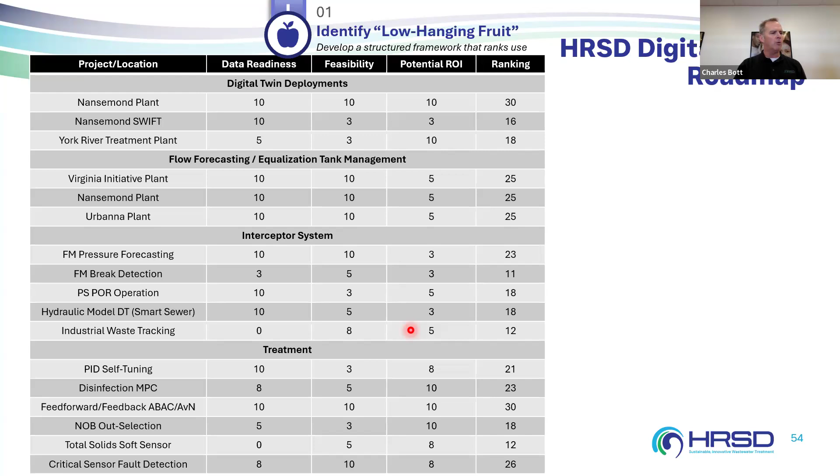And we've done it, and we've deployed these in a lot of cases. One of the things that seems to be the case is it's easy to get to 80% of the solution, but it's really hard to get something actually built, deployed, and working. And so that's the objective, to solve these problems and then learn from doing that so that we can go broader and deeper with other problems.

We've created the foundations of a data pipeline, one behind the firewall of our plant control systems, plant and collection system control systems that's focused on control, and then one outside of the firewall that's focused on guidance and dashboarding.

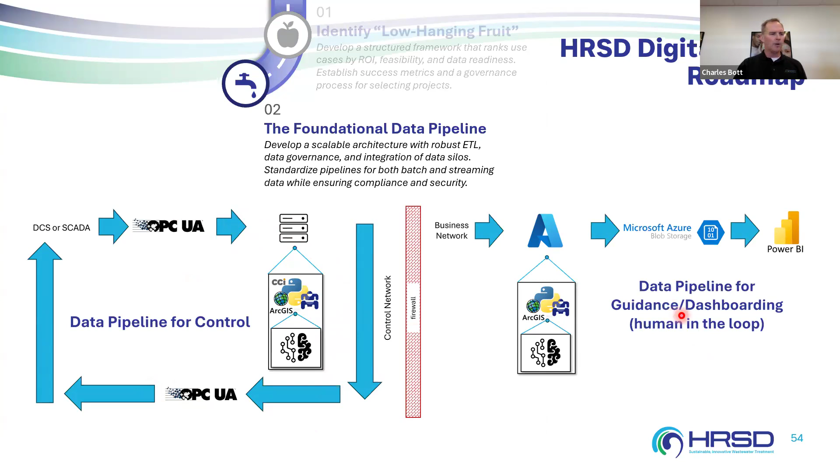And operationalizing, as I mentioned, is important. This is that ABAC controller that Jeff developed. We've got some generative AI and agentic AI applications coming in collaboration with MAIA Water. And we've even started some work on wearables that would provide information to operators and mechanics in the field. And robotics as well, focused on providing monitoring around a treatment plant that takes some load off of our staff.

So one of the interesting, really interesting observations that we've made recently is that there's a lot of tiptoeing around the use of AI tools and the development of those tools such that people lose their jobs.

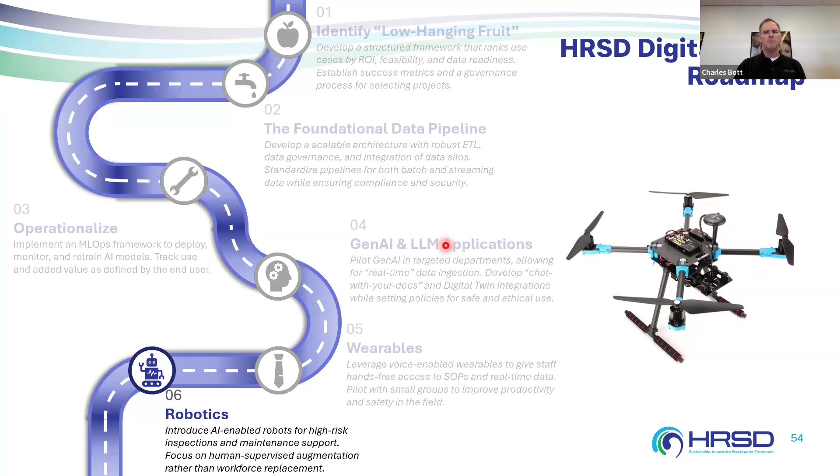What we have done is kind of turn that on its head. We're not going to tiptoe. We're just going to eliminate shift work. So what we've established as a goal for our digital water department is, even at our largest treatment plants, to eliminate shift work, meaning our goal is to staff our treatment plants 5 days a week, 8 to 12 hours per day, and eliminate night and weekend work. We can hire really good operators, but nobody likes to work shift, and that's one of the most significant reasons we lose them. Combining problem solving with our R&D department and our digital water department is important, and that's where that imaging work comes in.

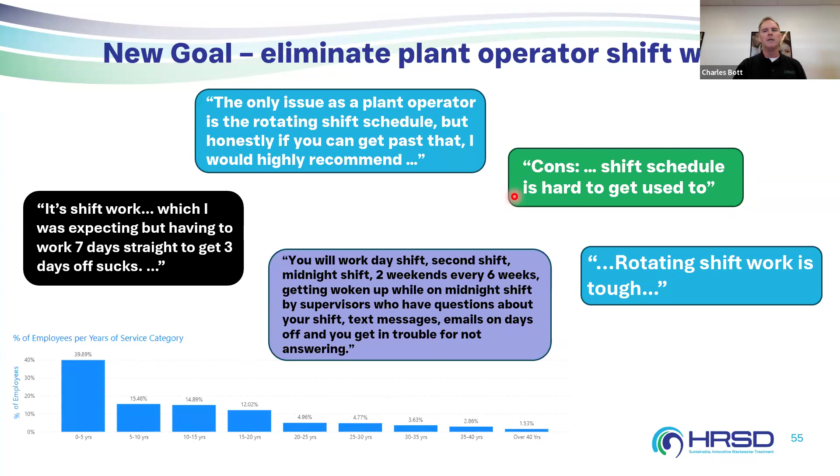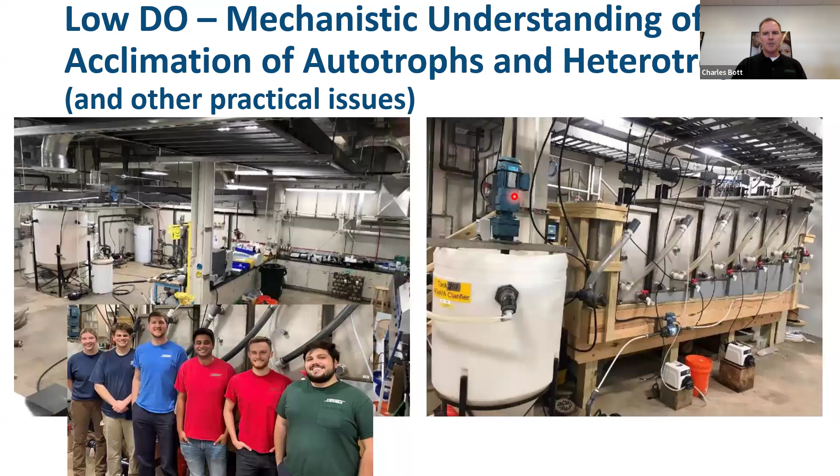One of our newest areas is really focused on low DO, understanding mechanistically the acclimation of autotrophs and heterotrophs to low DO. It turns out this is where our work on BioP fits in, and where we're working a lot to make BioP better even in the summertime. It's really focused now on low DO. And I'll just mention, it's not all complicated. As we go to low DO, we realize we need to separate mixing and aeration in our aerobic zones.

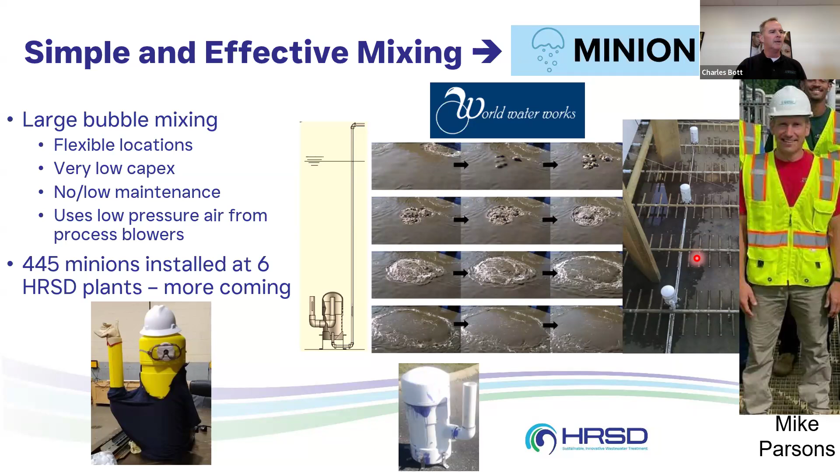We commercialized this as well. There was a lot of demand for it, and we hadn't planned to do that. We were just building them and installing them ourselves, but based on the demand and people wanting them, we commercialized this, and now World Water Works is selling these Minion mixers. They even partnered with AM Team to do some CFD modeling of the Minion mixer.

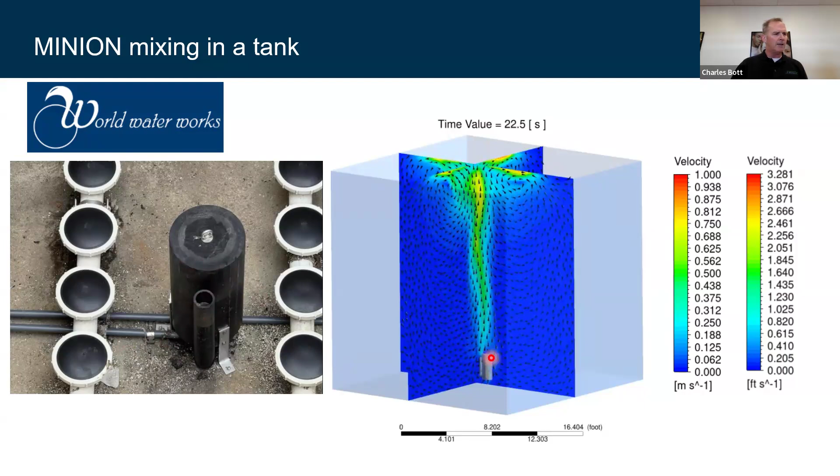And again, this is using air. This is the commercially available Minion mixer, which is made from welded HDPE, not PVC fittings, but it looks a little more robust and a little more formal. Basically, it's using low pressure air right off the same air header that the diffusers are using. Air continuously fills this reservoir and it periodically burps out. And yeah, that's how we mix our tanks now.

So I'll end with a quick overview of the side stream part of our Nansemond plant. I know that's an odd thing to talk about here at the end, but I think there's some interesting things to discuss. So for the last period, since 2010, we've had in place at our Nansemond plant the Ostara struvite recovery process. When that was originally installed, it uses magnesium chloride and sodium hydroxide. This plant has anaerobic digesters, but you'll notice there's no side stream nitrogen removal. If you remember back, I just mentioned that we solved that problem.

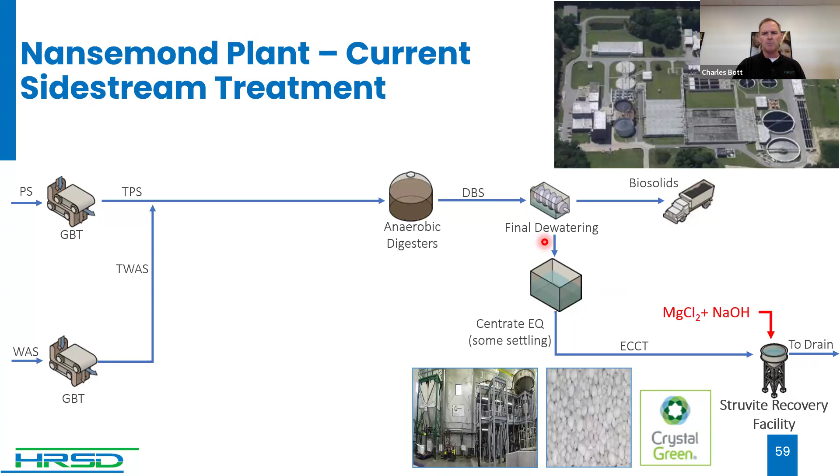We added side stream PNA, and that's not on this diagram because I'm getting ready to show you what the Nansemond side stream system looks like, or is in the process of looking like right now. It's under construction, but this is what the side stream part of that plant becomes. And wow, it's complicated. I hadn't really realized how complicated this system is until now. But there's some interesting pieces in this complication. The point is that while this is really complicated, this is what it takes in order to achieve all the things we want.

So first of all, we've installed Greasezilla. We have a lot of truck delivered grease waste coming into our treatment plants. This is one of 3 facilities that receive grease. At this facility, we installed a process called Greasezilla, where we convert that to a low quality fuel oil that's used on ships, bunker fuel. Then the residuals of that go into the digester. We've added WASSTRIP that results in more phosphorus stripping and therefore more struvite production, with some separate pre-dewatering associated with that to intensify these anaerobic digesters. We've also installed side stream PNA MBBR that's not really branded because it's our own design. But when you put all that together, what that means is now the struvite recovery facility is alkalinity short.

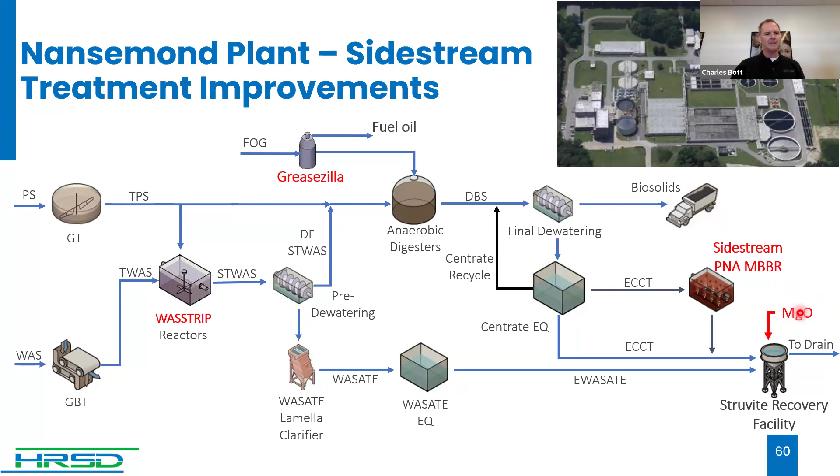We no longer have sufficient alkalinity to make it cost effective to operate, but we have the potential to generate a bunch of struvite. So we had to figure out how to make it cost effective without using magnesium chloride and sodium hydroxide, but transition this facility to magnesium oxide. It took about a year and a half of pilot testing on one of the full-scale reactors to figure out how to do this. Now we're in construction for a dry magnesium oxide system with a slaker to feed that system.

So I'll conclude with that: really what we're doing here is leveraging our infrastructure, our expertise, and our R&D group for economic development opportunities, community impacts, and building partnerships and collaboration. But we're also using our applied R&D to manage the risk of deploying new technology.

Don't wait for others to bring innovations here. Our peer utilities are not our competitors, so we work to collaborate, and we work to get universities, consultants, and tech providers involved. But in the end, we try hard to drive our own goals.

And what's next? So PNA remains the future goal. We're pivoting back to PNA now from a process research standpoint, although we still have engineering work to do to figure out PDNA by IFAS. And what we think is that PDNA is really the path to make PNA possible. We've got some indication that seems to be right.

Using wastewater carbon as efficiently as possible — we have one plant where we're doing that, as I mentioned, with intermittent step feed and intermittent aeration.

Low DO, we're headed there whether we like it or not. If we want to do all these other things, these processes are going to be operating at low DO. And we think that might be really the key for making BioP really reliable.

Sensors and controls are becoming more and more important, and generative AI tools and all sorts of interesting tools and methods are coming quick, and we've responded with our new digital water department. So that's it. Thank you for your attention, and we can take some questions now.